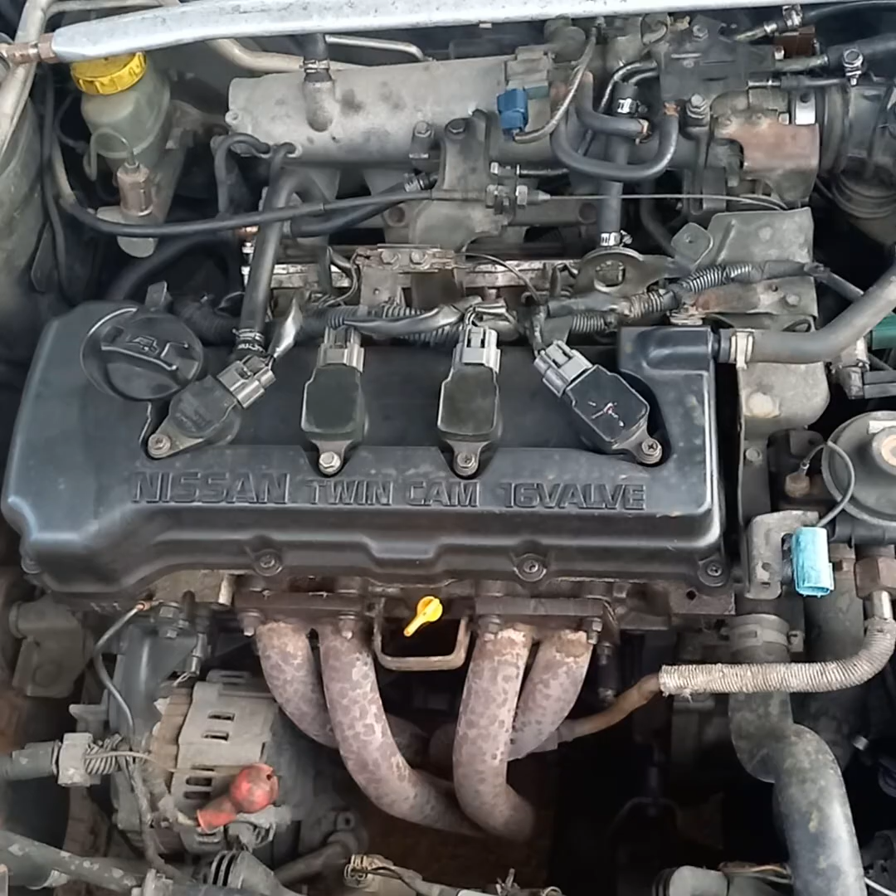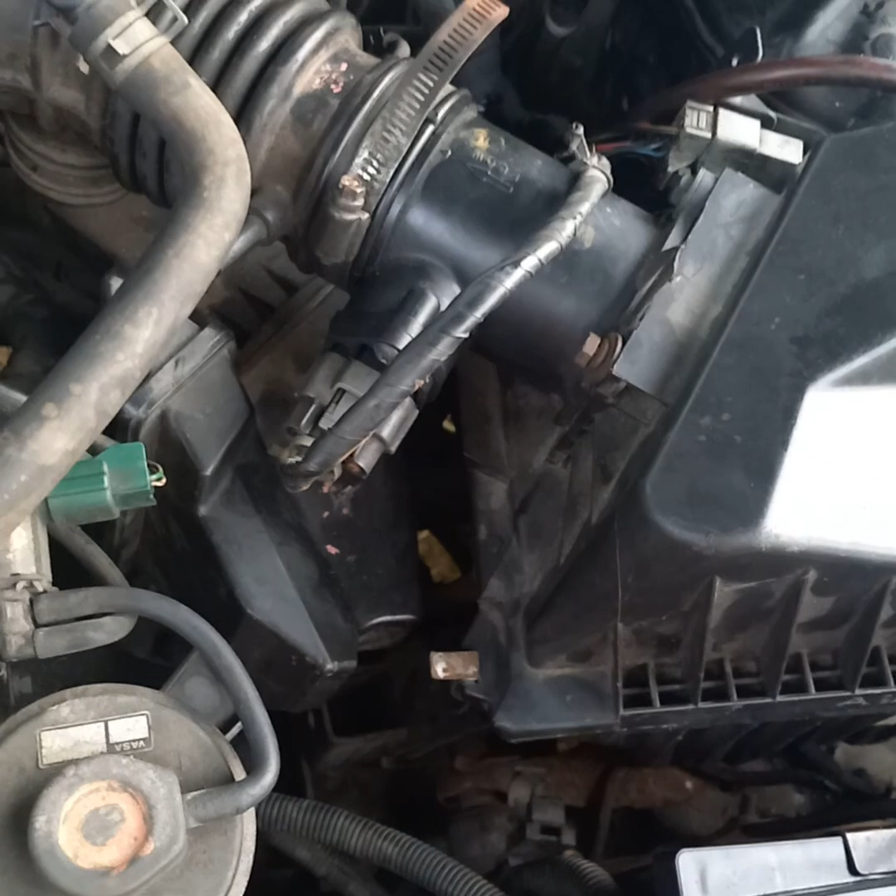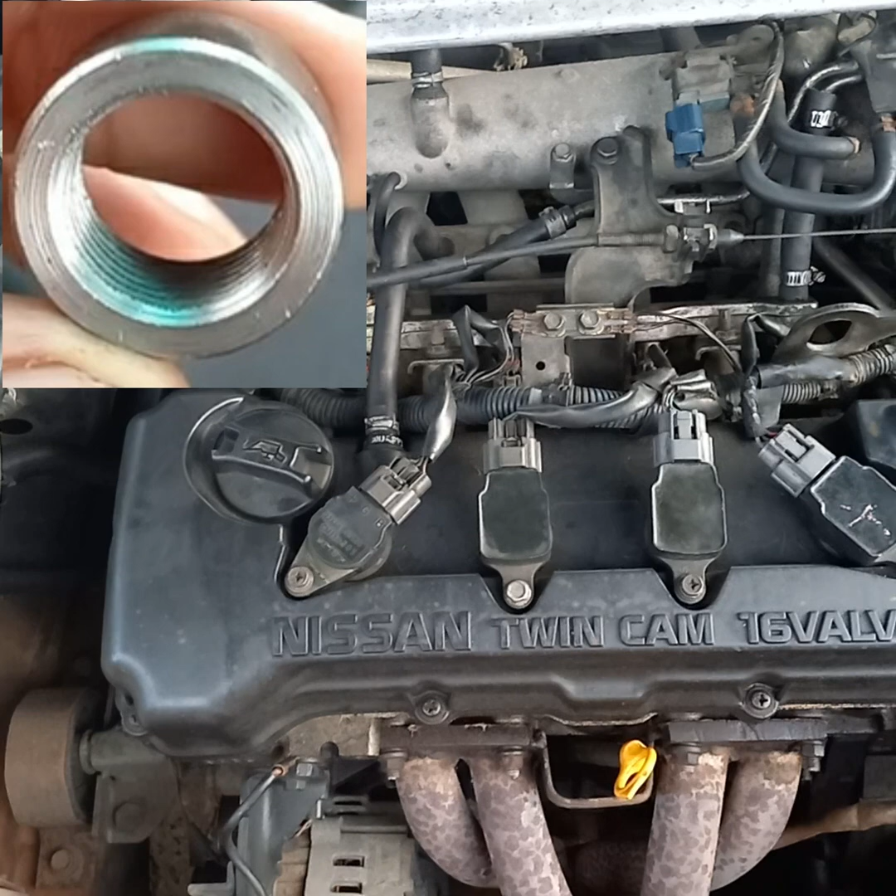Alright, pleasant good morning. What we have this morning before us is a Nissan Almera with a QG15, cable type throttle, 4-pin mass airflow sensor. The previous owner had put in extractors, but they removed the oxygen sensor. So we went by a muffler place yesterday. They welded on the adapter so we could thread in an oxygen sensor.

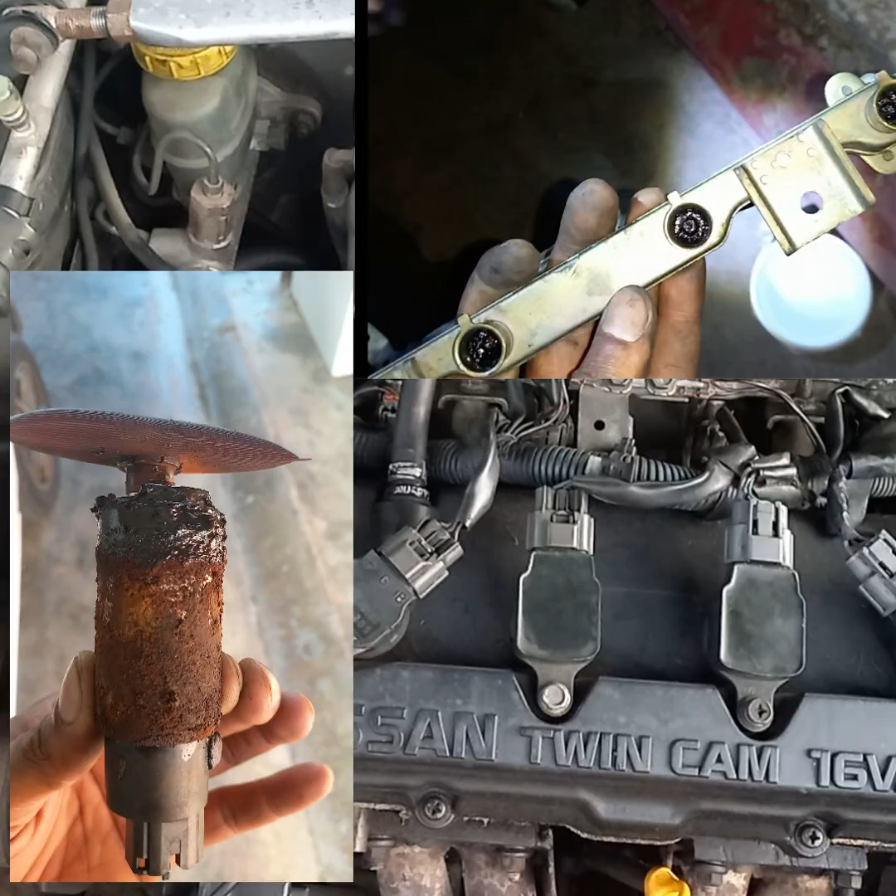And if you see here, we have some wires here where we ran the oxygen sensor. We had to run it a little lower down because where the fork comes into one, it will meet it right by the axle. So to prevent any damages, we had to run it back there. The problem we're having is it was down for 2 years. Everything was clogged up with sludge, and so we had to clean out the rail. The injectors are still in a mess.

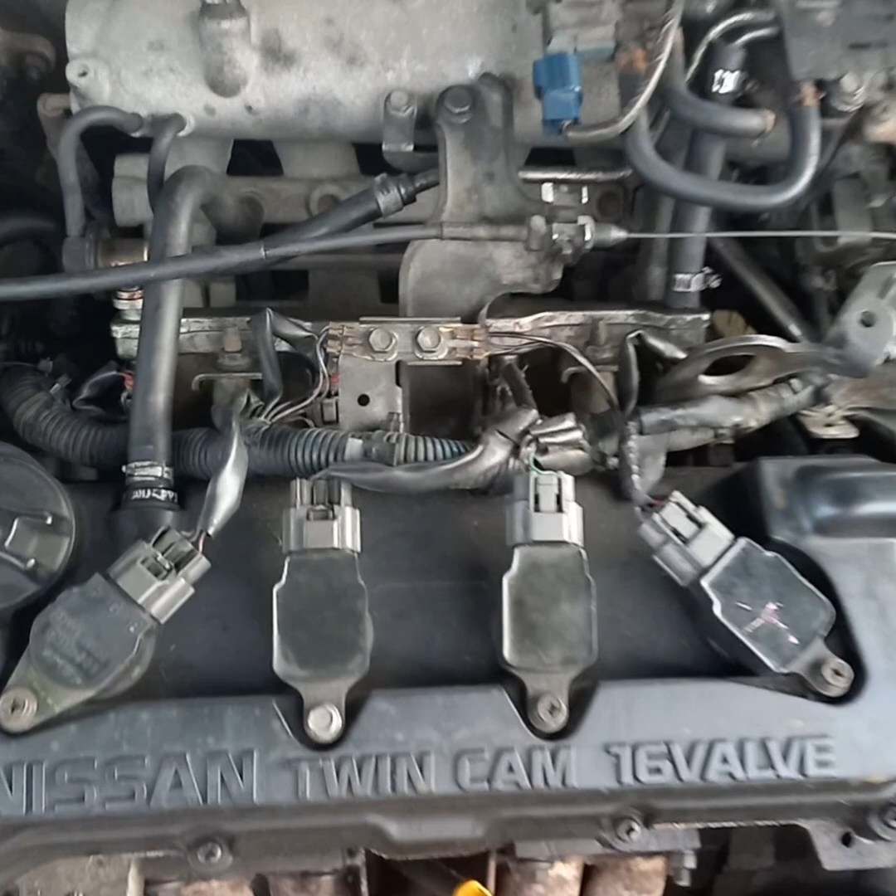We get a rich condition, so the brain is sending a lean signal to minus fuel. I don't have it recorded, but last night when I was checking, the injectors were sticking open. So that means fuel is always spraying. So what I'm going to do today is test it with known good injectors and see if that resolves the issue. I don't know if ultrasonic cleaning the injectors will help. So that's an option, but if not, the customer will just need to buy 4 new injectors because all 4 injectors were giving the same problem.

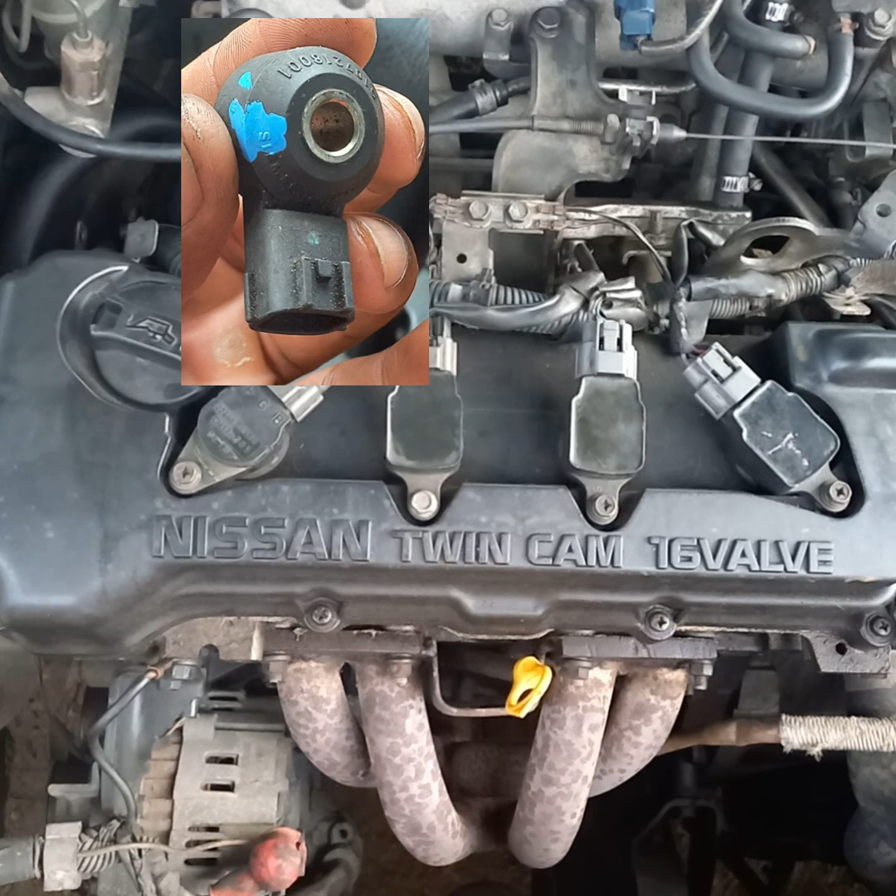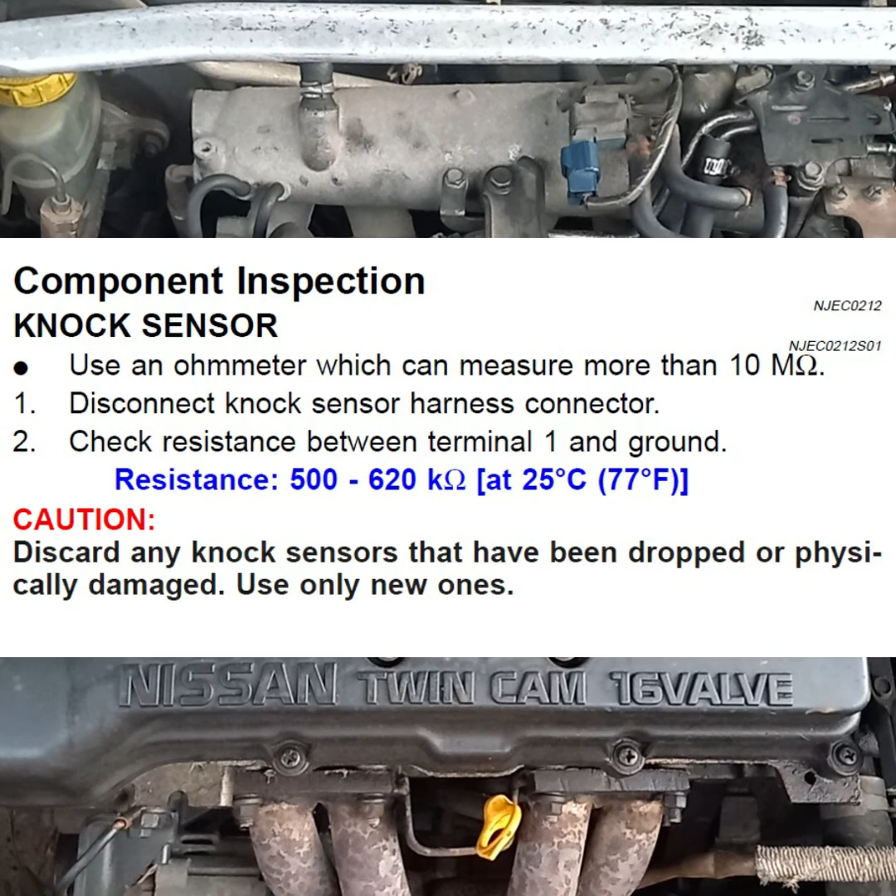Another problem it's getting is the knock sensor. The knock sensor is giving a code, but when I checked it yesterday, according to the wiring diagram, whoever hooked up the knock sensor mixed up the wires. So I'm going to switch around the wires and put them back in the correct order according to the wiring diagram and see if that resolves the code, because the voltage to the ECU is correct, the resistance is correct as well, within spec. So the only thing not consistent with the wiring diagram is the pins. It looks like pin 1 and pin 2 are mixed up.

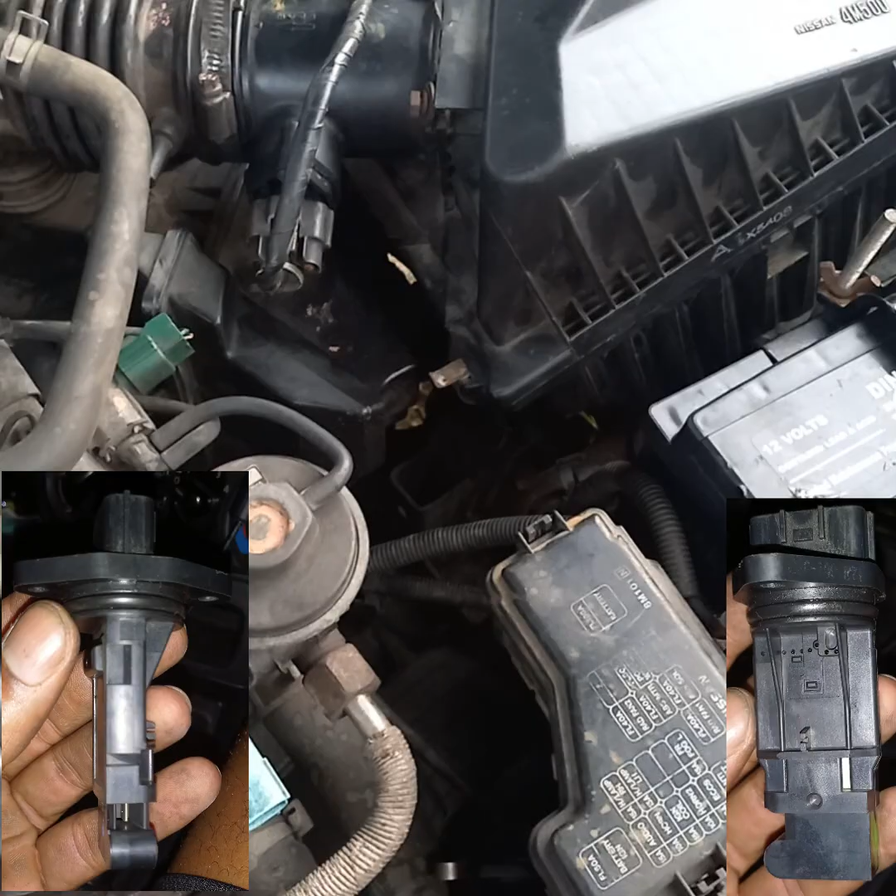Also the airflow sensor was bad, so we had to change that. We changed some of the fuel hose, we had to change the fuel pump, the fuel tank. Alright, so I'll go in and start the vehicle now and allow it to reach operating temperature. So we hook up the scan tool and see what's happening with the rich condition.

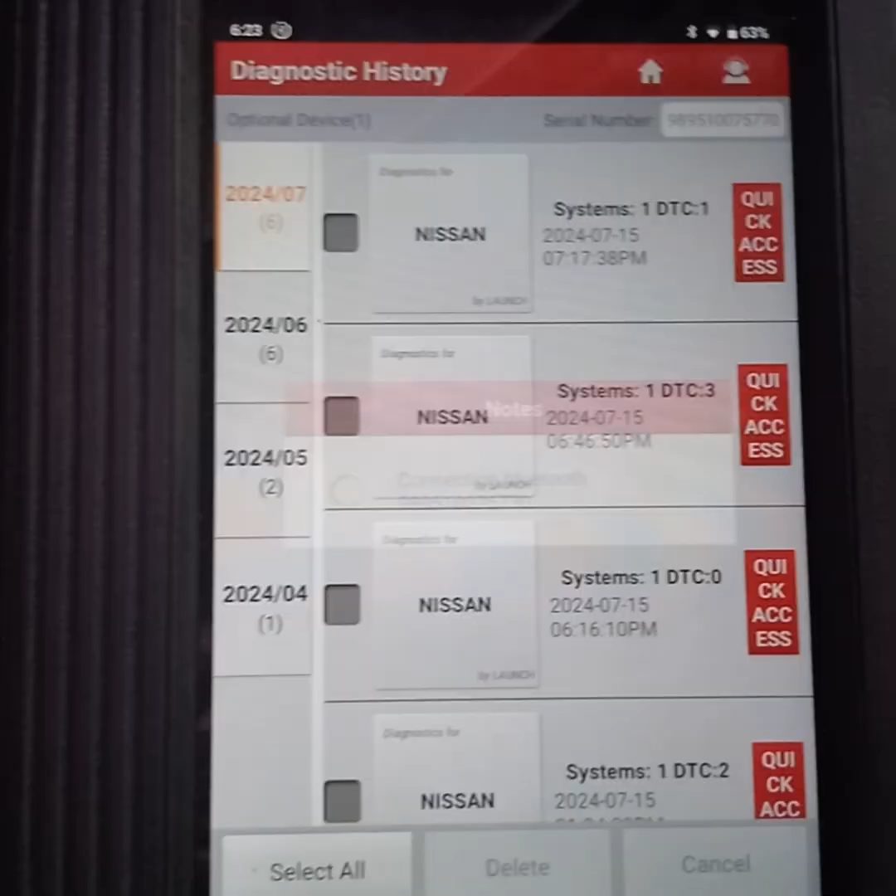Alright, so in the vehicle here, the scan tool is the Launch X431, the 8-inch version. I scanned the car last night, so I'm just going into the diagnostic history. I just need to press quick access. Put the ignition on in the vehicle. The VCI is plugged in. I took out the dashboard to do some tracing of some wires. Right, system selection. Right now we're only looking at the ECM.

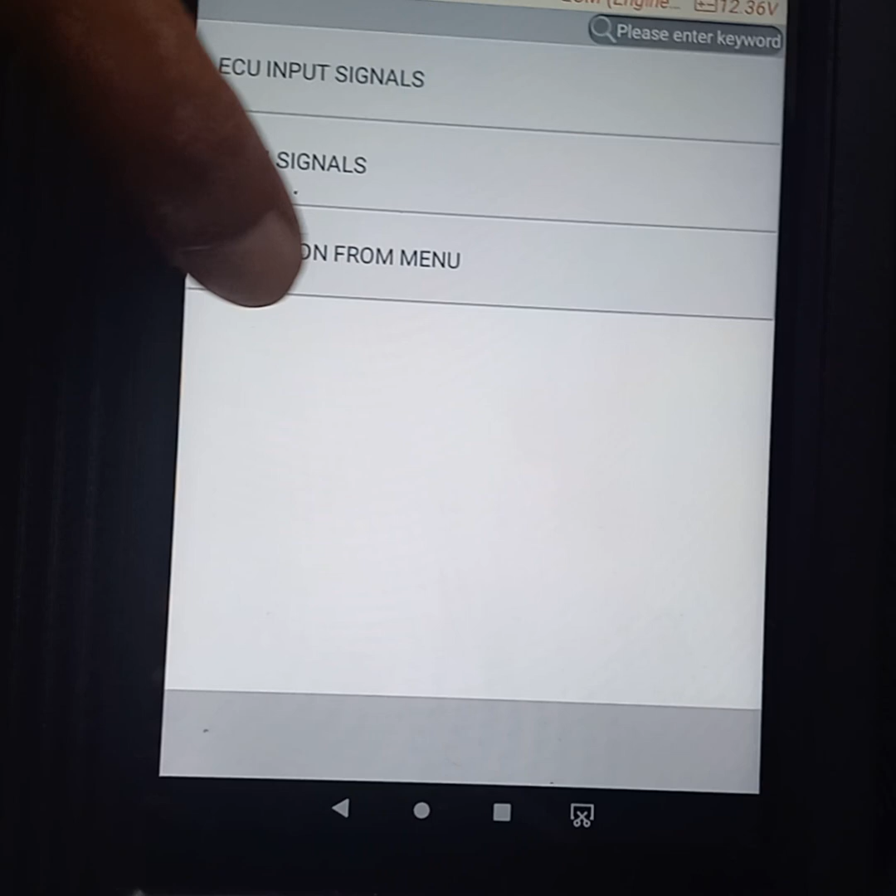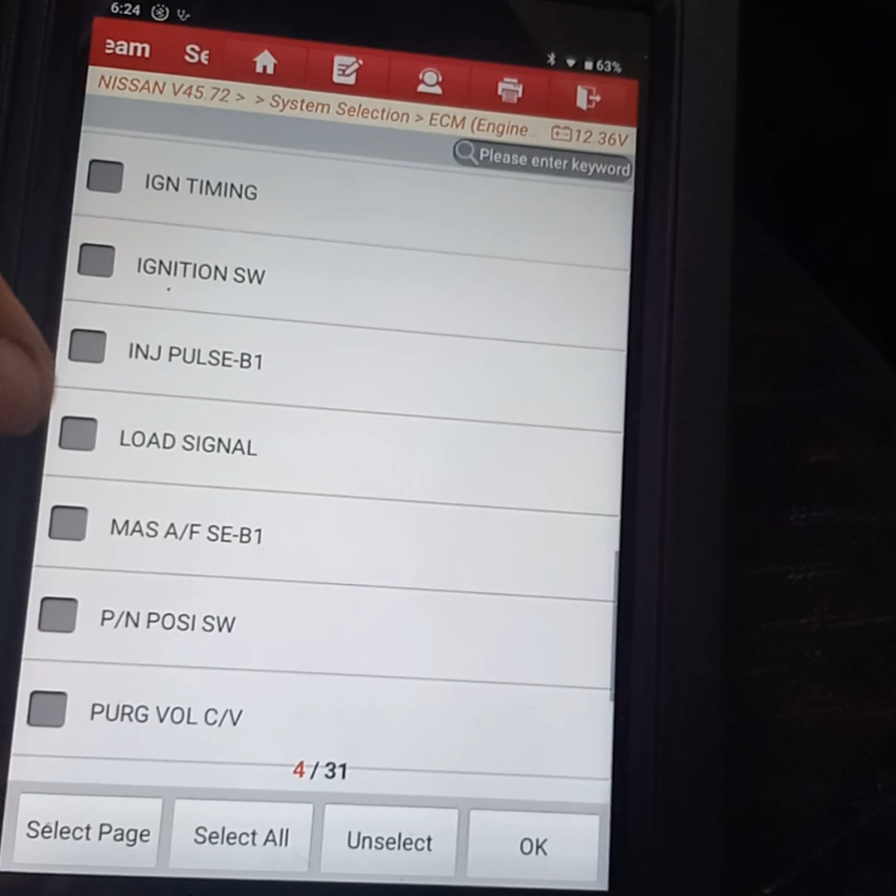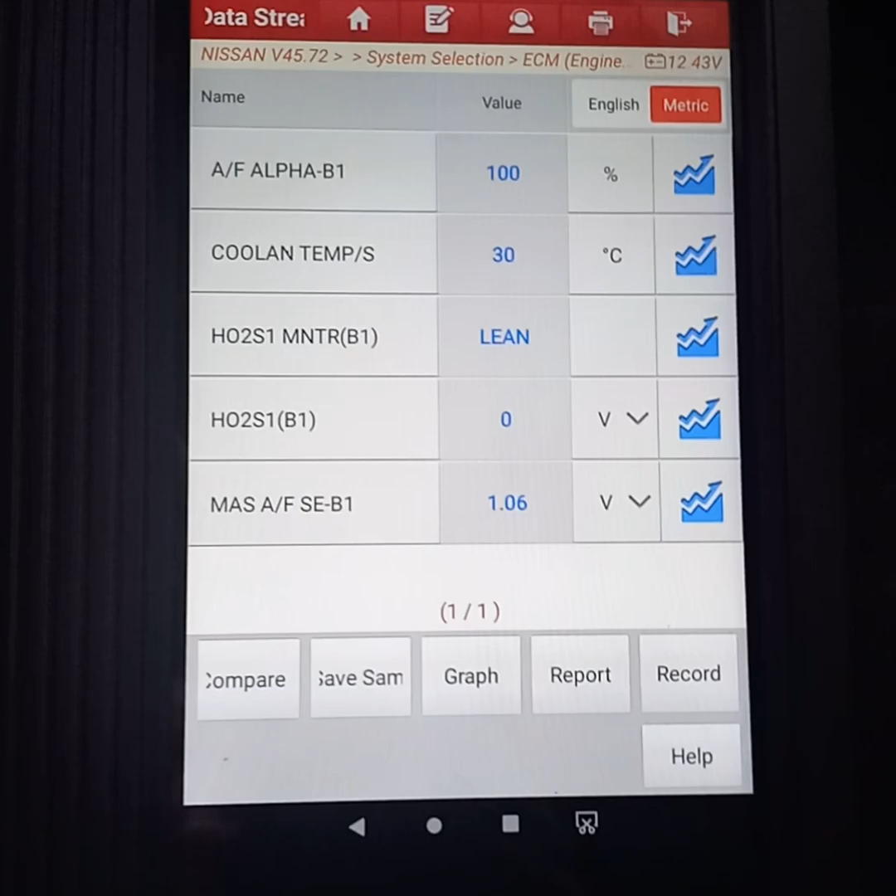Right, you want to read data stream. For now we're just looking at the alpha B1. We want to look at the coolant temperature, the O2 sensor, the MAF sensor, and that is it for now. Press OK. Right, so this is it with the vehicle not started.

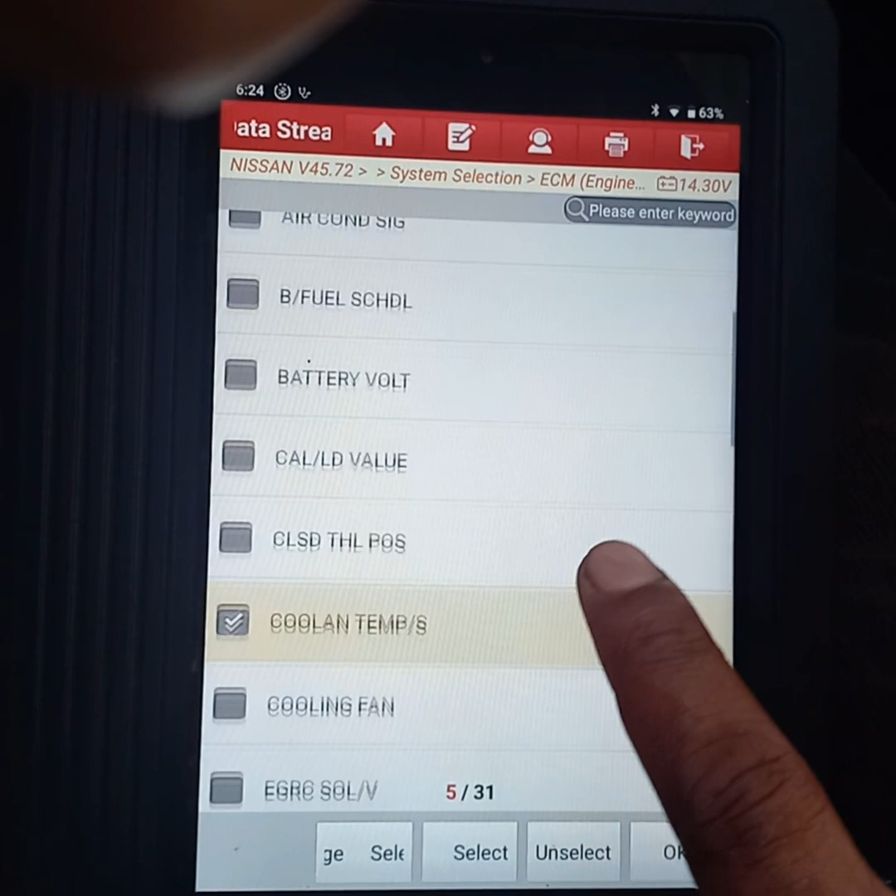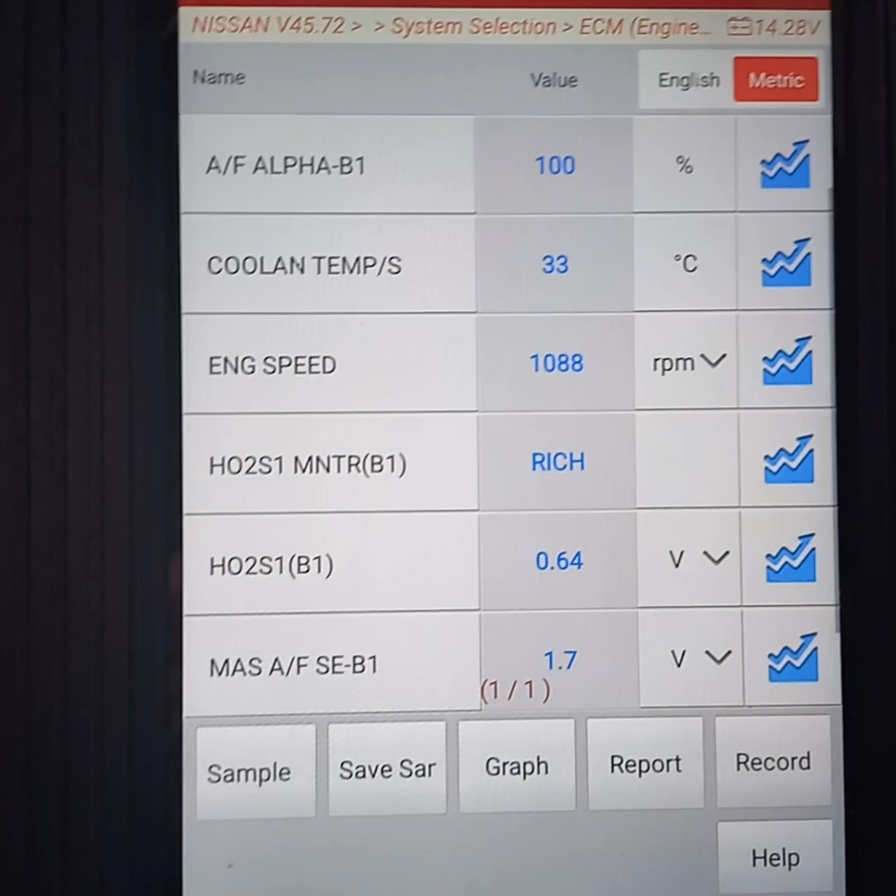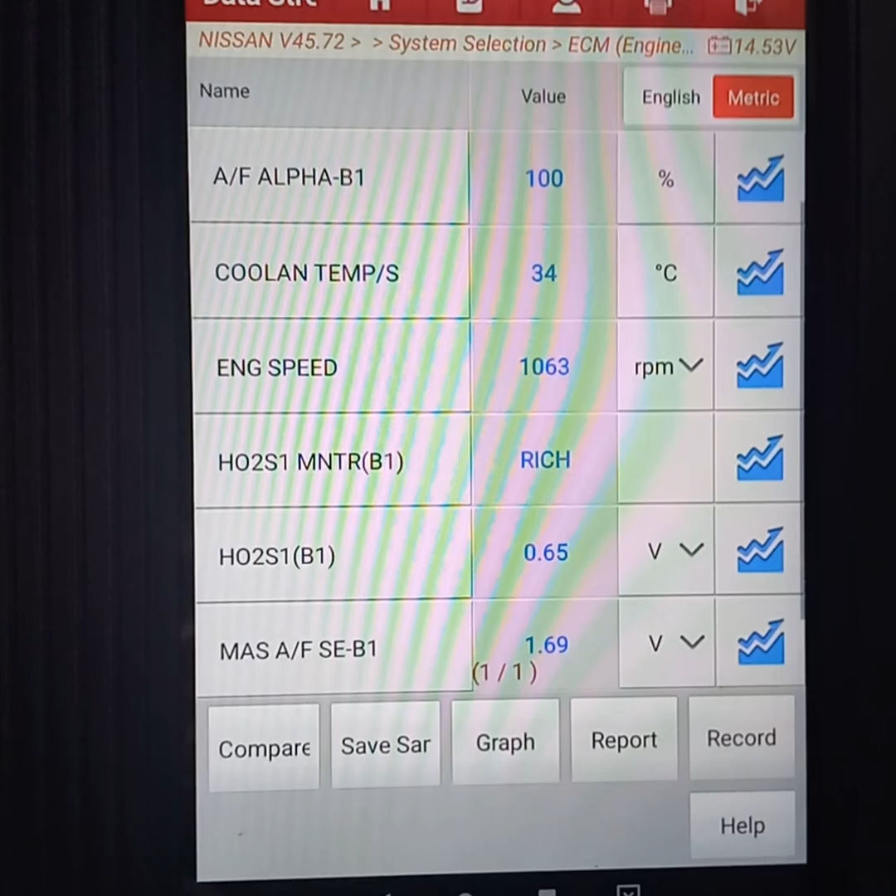Right, so I'm going to start it now. Oh, I forgot to add the engine speed, so I'll go back in. Right, and engine speed. Right, so we're good to go. So we see it idling at about 1100 RPM. The car is now warming up. Before the O2 sensor starts to do anything, it needs to reach operating temperature, and then it will start to oscillate. So I'll pause here while the car heats up, we're going to reach about 70 degrees Celsius.

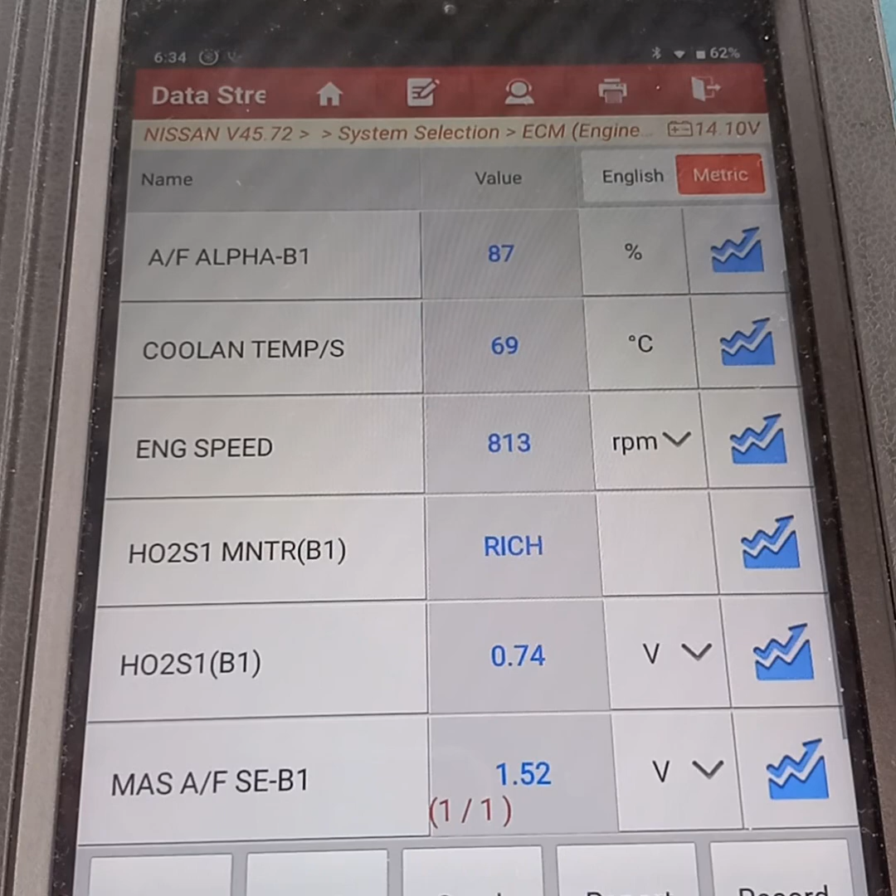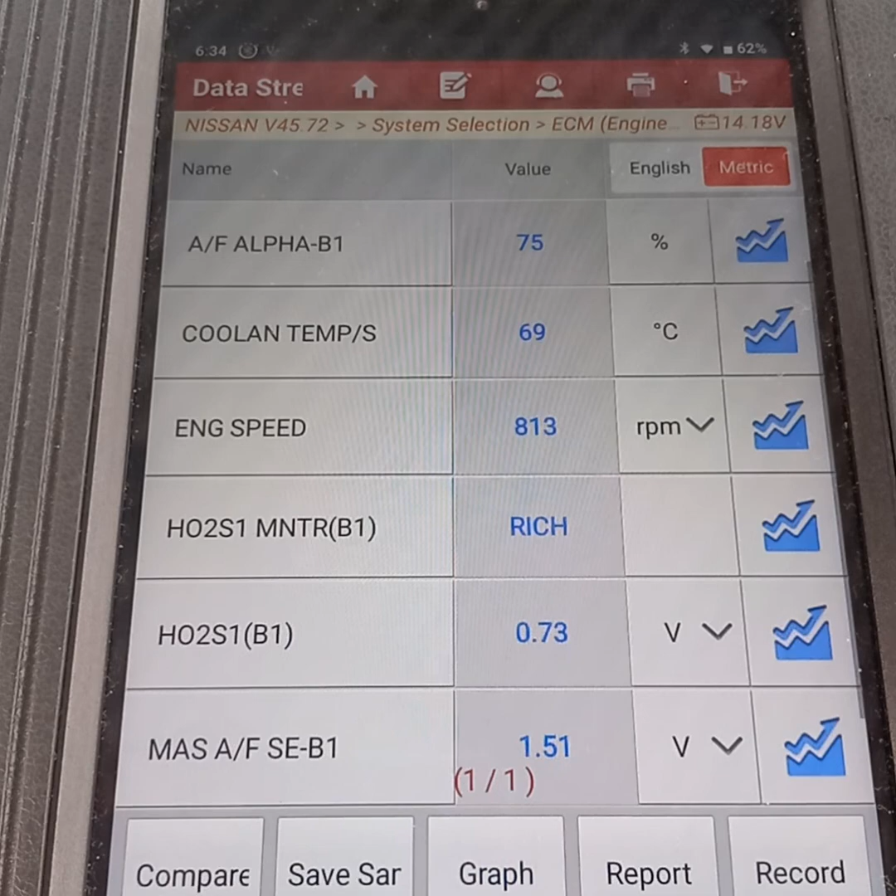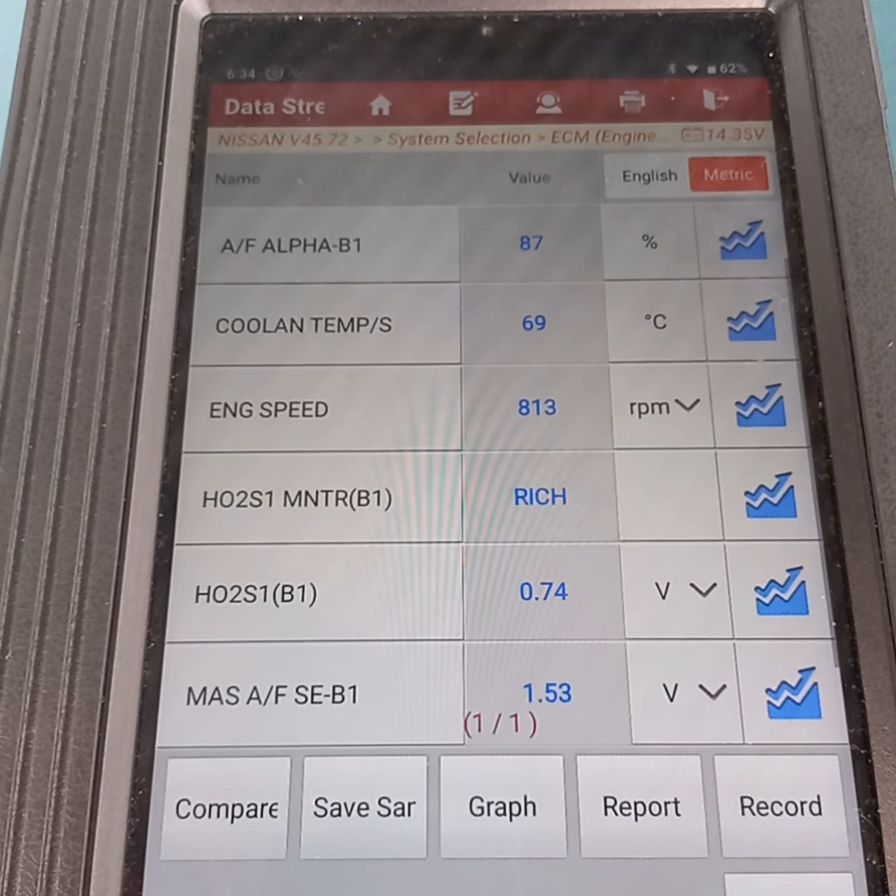Right, so it reached the temperature enough so that we could see the effects of the rich condition. So you see the alpha or the fuel trim from 100 it's just going minus, it's very rich. And you see the O2 sensor stuck at rich as well. It's going down. The most it can minus is 25, then it will start back over. Alright, so you see, very rich. If I create a big enough vacuum leak, it kind of compensates and you will see it start back to oscillate and go between rich and lean.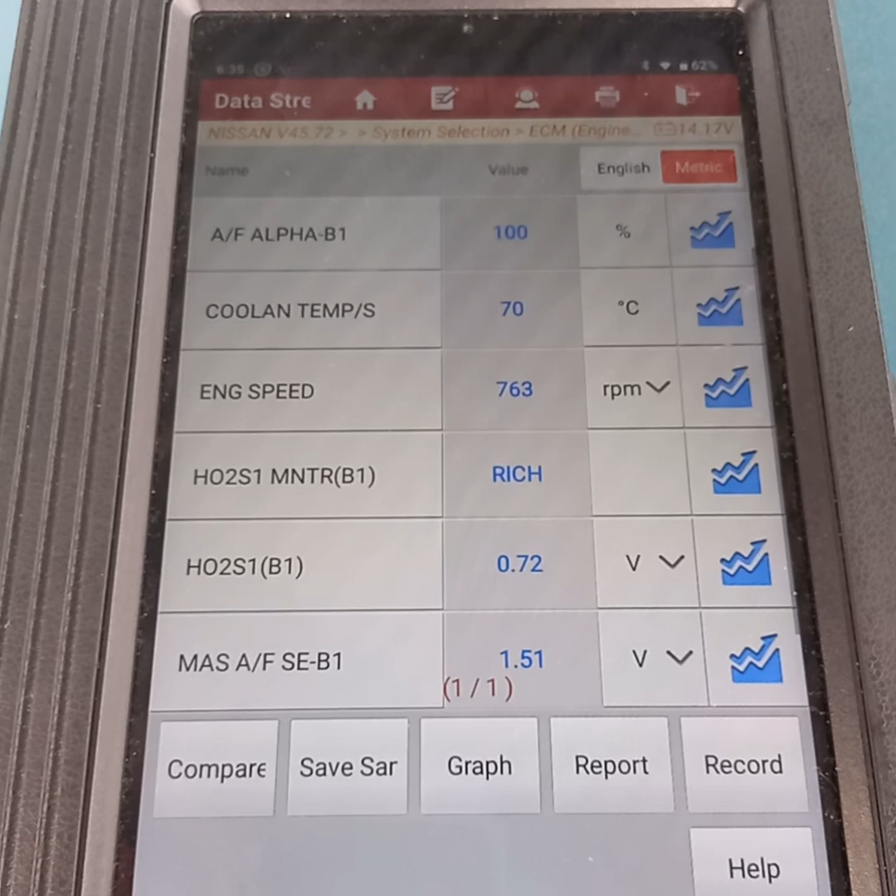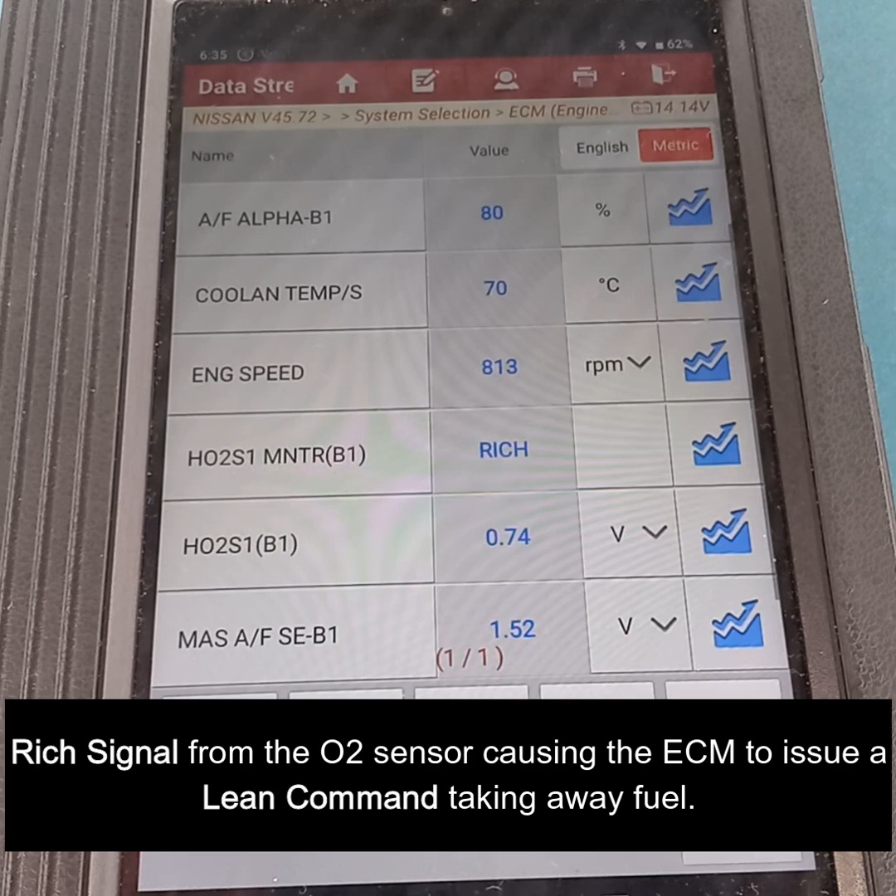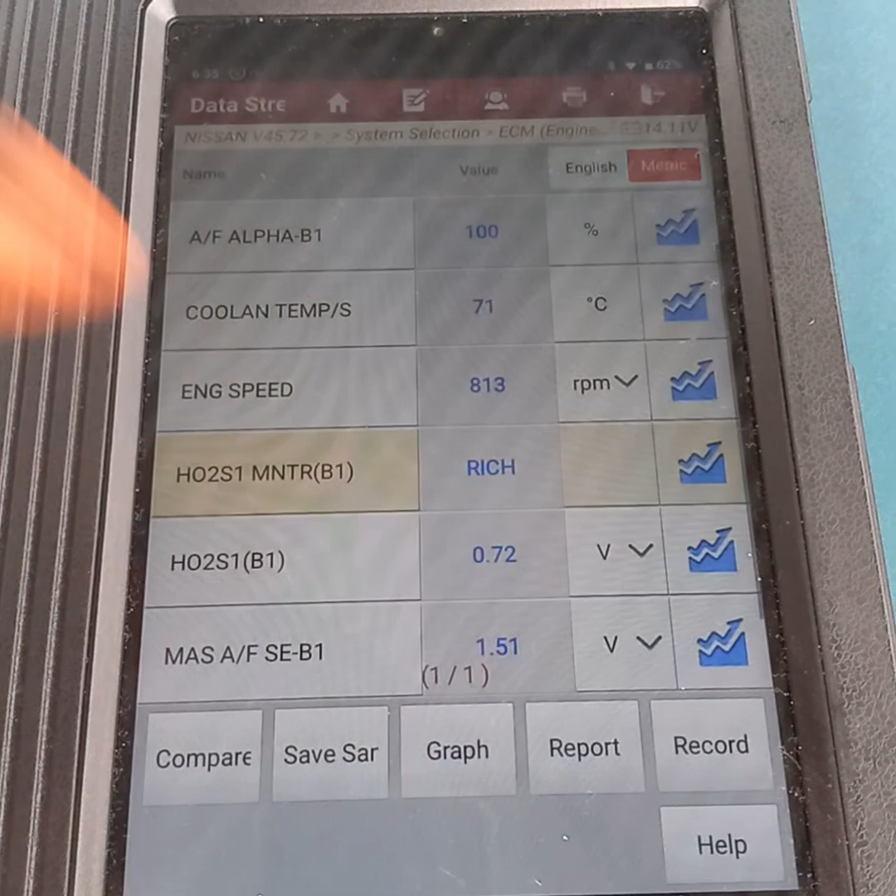But for time's sake, I'll just go in and change the injectors with four known good injectors, and then we'll start back. But I just wanted you all to see the rich condition. That's sending a lean signal to minus fuel. And as I said before, when I took out the injectors last night to clean them, and I applied the injector cleaner, and I pressed the pulse, it was leaking. So although the signal for the injector was off, it was still spraying, really spraying.

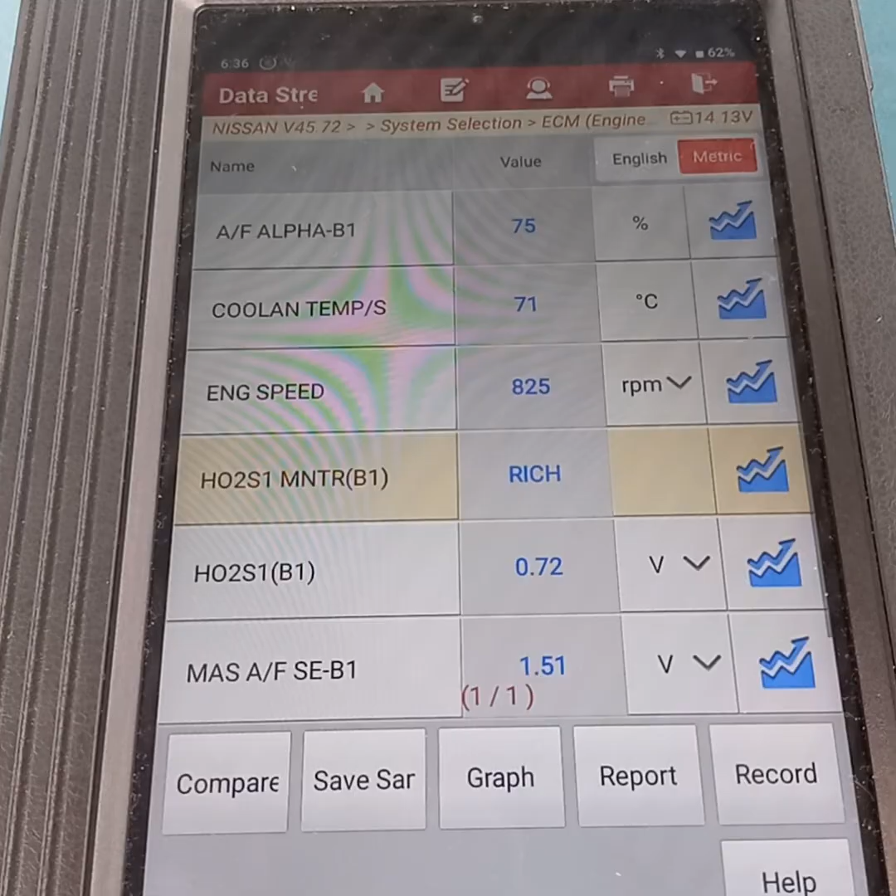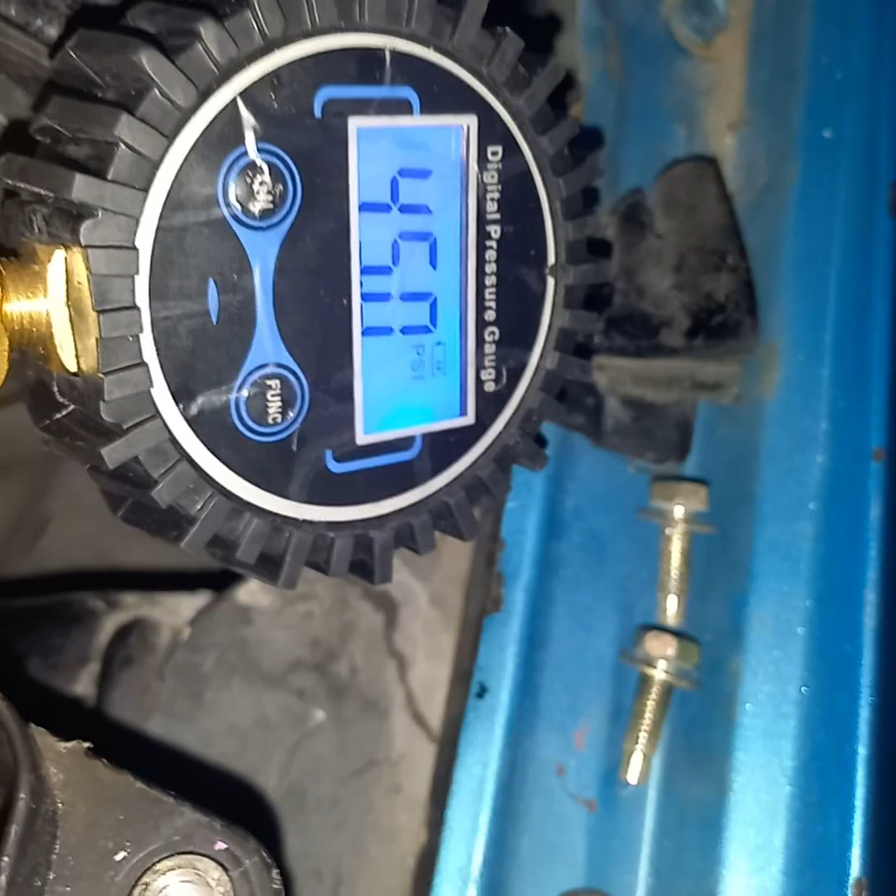Had the brain out, checking to make sure all the grounds and everything are functioning. And then I had my fuel pressure gauge. Right, so fuel pressure is around 36.3 PSI. If I disconnect the regulator line, you'll see it go up to around 40 something. So I'm going to do that now. Right, so we're up to 46. I just disconnected this vacuum line here. So there's the regulator. Right, so we're getting 46.

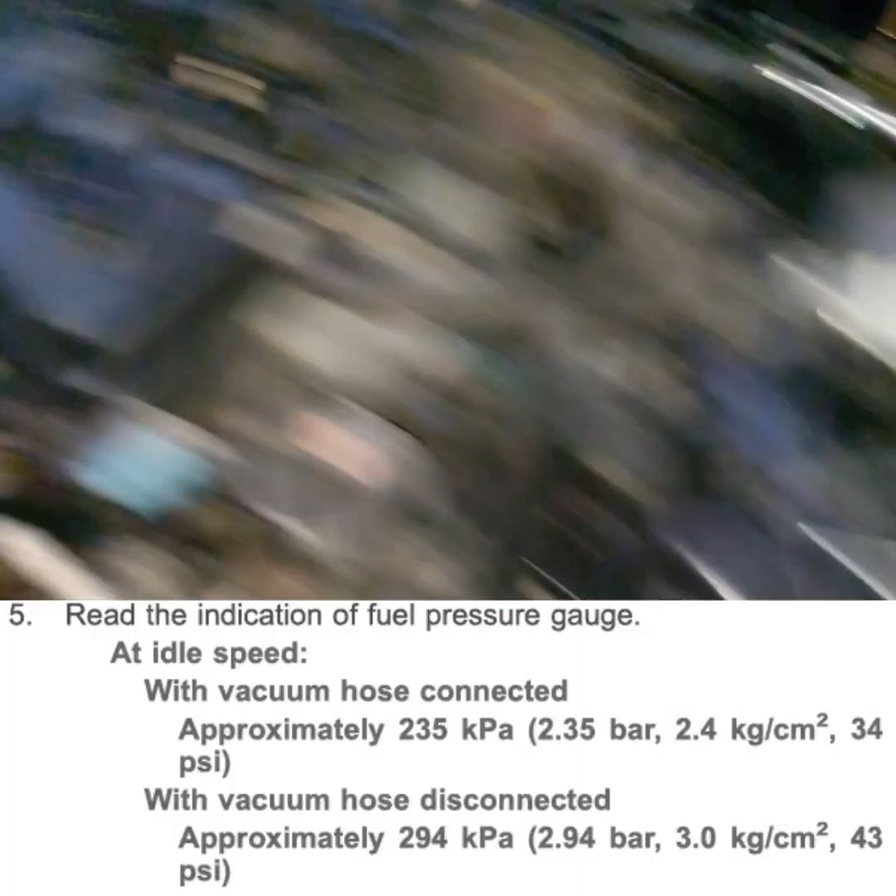And when I put it back, the car is sounding like it wants to stall. But you see we're going back down to 37, 36 around. So the regulator is working as well, so I have to put back the brain. The next thing again is the knock sensor code. I want to try and resolve that.